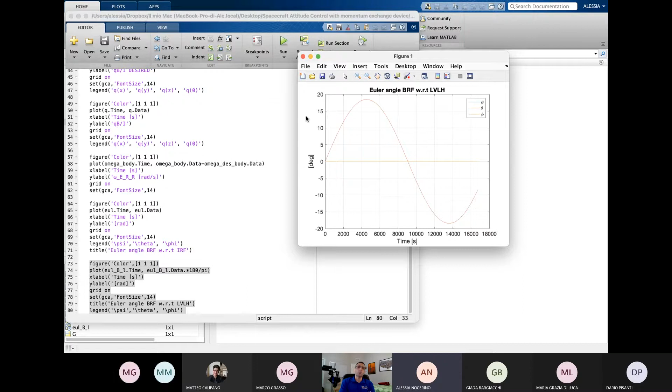It's one orbit? No, these are 3 orbits. 3 orbits. And of course, these are degrees and not radians. I hope so. Okay. So maybe you guys can compare codes and see where the mismatch is. I'm sure it's something minimal, even though

Dario's quaternion error doesn't look like something that should be unstable. It's a constant quaternion, it's constant one almost, and then there's one component that oscillates, but I don't know why it's coming out that way. But yeah, you're getting there. So it's definitely a matter of initial conditions. You don't want to be too far away from it.

The one thing that you can play with, for example, now that you have it working, is keep reducing that 0.9 coefficient on the initial motion until it breaks. It's basically seeing when things are not linearizable anymore. And mostly what's happening is that the LVLH, I guess, is fast enough for your angles to grow outside of a linearization interval, and so the analysis doesn't apply anymore. Make sense?

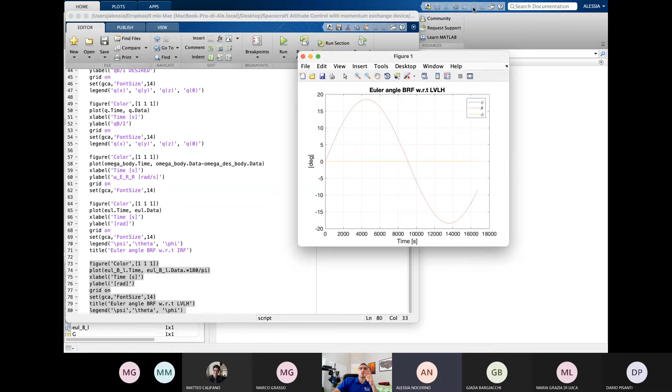Yes. Okay. So sorry, Professor. So yeah, the initial condition should be not perfectly, I mean, the angular velocity should be not perfectly the one of the LVLH. So I think what she has is the 0.9 is 90% the one of LVLH, but that 0.9, as you may recall, was applied before you converted into inertial. Yeah. Indeed, I did the same, but the point was that if I put exactly one, at least for me I have a stable behavior. I don't know, let's try it.

So if you put one, it's stable. For me, it's not stable. It was not stable. Oh, but that's not. Yeah, I thought we had run that case. It's the case when it was perfectly aligned, actually. No, so yes, sorry, I made a mistake. If it is 0, it was not stable, because we now agree that the initial condition should be the one aligned with the. Yeah, that's what we're doing right now.

You start aligned, but you're a little bit slower than LVLH, and that's one way. You can also start with the same angular velocity of LVLH and a little misaligned. Maybe you can play with different initial conditions. The goal is seeing the oscillation, and in order for you to see the oscillation, you need to have a non-zero relative motion with respect to LVLH. So you cannot be perfectly aligned and also moving the same exact way. You're not exciting the pendulum behavior, in other words.

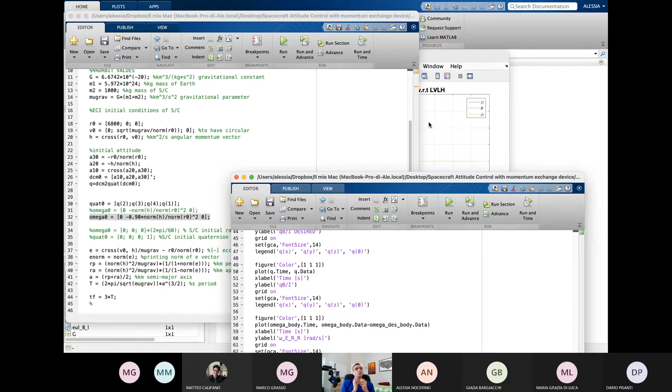But if you excite the pendulum behavior, you need to do it carefully so that it remains small enough that you don't go outside of the region of being able to say that it's stable, right? Perfect. Okay. Nice. And I cannot quantify that. I honestly do not have. I think it depends on many different things, but I would say a few degrees, no more.

And probably if you put 0, 0, 0 for your initial angular velocity, the LVLH angular velocity, even though small, after a few minutes has moved your relative Euler angles to an interval which is big enough to throw away all the linear analysis. Yeah. Okay. So I think you're doing just fine. It's just tweaking things here and there.

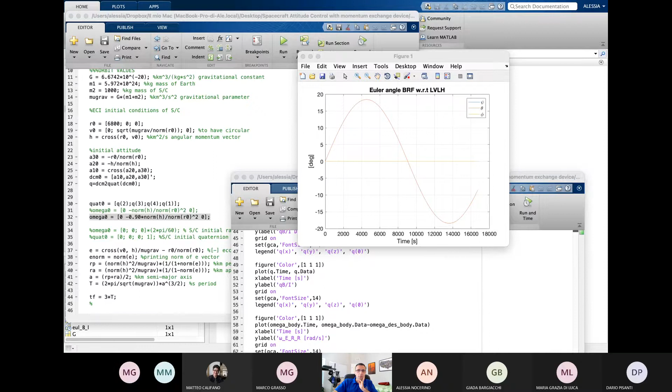I want to just very quickly go over this last material that I put for today without really digging into the details, okay? I also want to upload some code in there, now that I'm thinking about it. Well, first of all, let me share my screen. So, okay, not this one. Just 1 second. So the slides that Camilo presented are in the same folder. And this is the material that I had for today. And as I said, I will just go quickly.

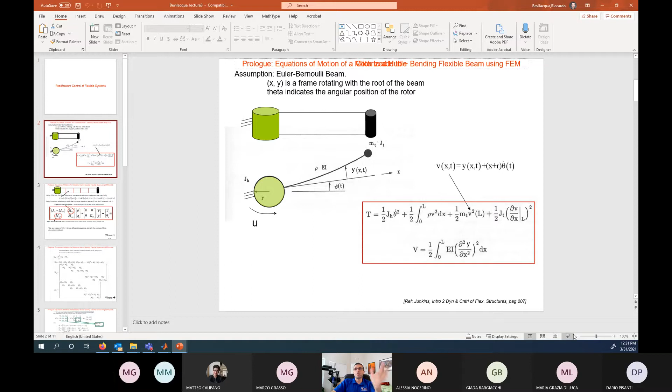But basically, the idea is, okay, let's simplify things, because in general, you will have to do a Nastran model of your spacecraft to compute the modes and the frequencies. You really don't want to do it by hand, except for very special and simplified cases.

And so this represents pretty much what I showed you in the video: a motorized hub, basically a spacecraft, if you like, which is the green one, that can only rotate about its symmetry axis, the axis of the cylinder, and the torque is U, its radius is R, JH is its moment of inertia about that axis, and then you have a flexible arm that has a tip mass with moment of inertia JT, T standing for tip.

You can write the kinetic energy of the entire system, rotational plus translational plus the one that has to do with the continuum, which is the integral that you see from 0 to L for the linear velocity. Rho is the density of the beam, and then this is the term that has to do with rotation, which changes according to where you are along the beam.

And then this is the potential energy that only has to do with, of course, the flexible part, which is the beam itself. And so if you basically follow what we saw yesterday, using the finite element approach to the Euler-Bernoulli beam, you have your shape functions L1 through 4, and you can eventually write your discretized model for the system, where the mass matrix has off-diagonal components that represent the rigid elastic coupling terms.

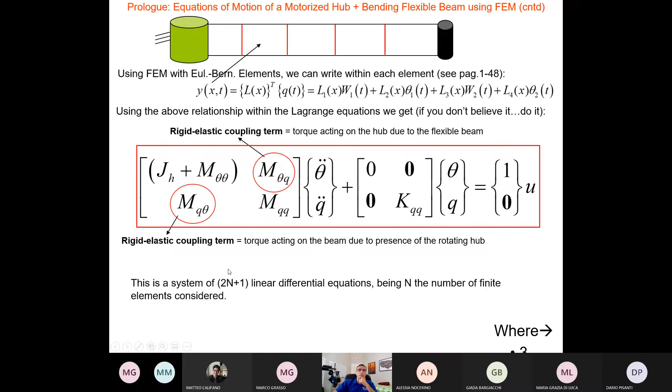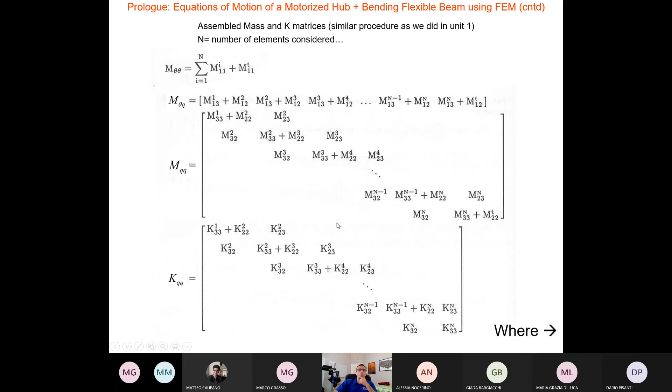Basically, the torque acts on the beam due to the rotating hub, and vice versa. The beam itself flexing will act with a torque on the hub, because it's flexible. And so these are the expressions that you get. In particular, the matrices are given in these forms, and going manually through the same processes that we've seen yesterday, you can show that these are the individual elements that go into those matrices. It's not a crazy exercise, but it's definitely tedious. And in general, as I said, it will be done for you by some software.

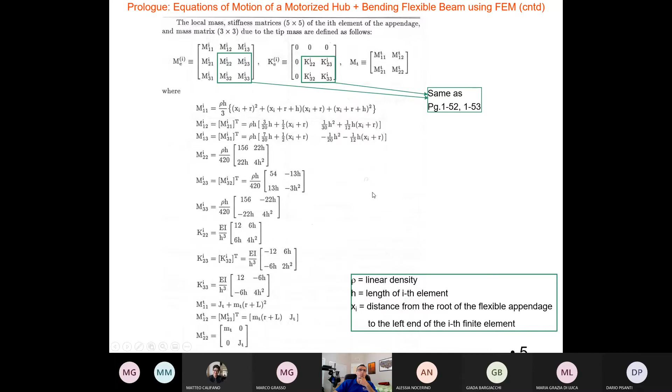So again, these are the equations of motion. You use the modal analysis that we have seen to diagonalize the matrices, basically. And so in the new state, you can find a matrix that has on the diagonal the natural frequencies of the system. And also, if you want to add some damping, you're more than welcome to do that, but that's something that we have to make up or measure through experiments. This type of representation can be put in the linear state space form, like a linear time invariant system.

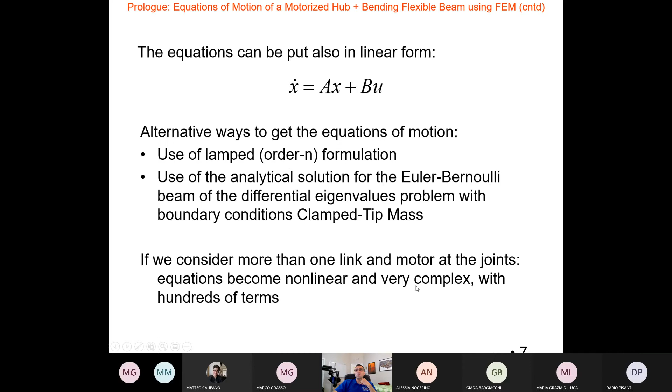And so, bottom line is that if we consider one motor, one link, the goal would be to control now the orientation of the hub, but at the same time, what the tip mass is doing. If I go back to the example itself, you can interpret this as a spacecraft that is trying to reorient an end effector. Maybe there is something here that needs to grab another spacecraft. And so your goal is reorienting yourself, but also, since you can only act on the hub, what do I do to manipulate the position of the tip mass in an intelligent way?

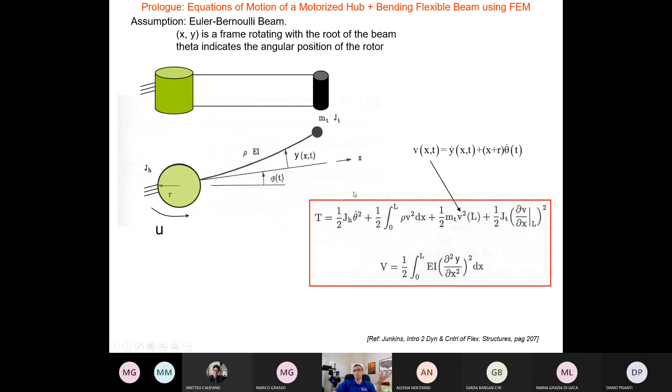And maybe the intelligent way is just that you want to reduce any residual vibration after the reorientation, as we've seen in the videos, and that's a good enough goal. But you have to do it with just one control variable, which is the torque on your hub. And so for feed forward, we're not really doing any feedback control, but basically what you're going to do is this. You have a reference motion for the hub. So you want that to be reoriented, I don't know, 45 degrees, and you would like to do it maybe time optimally. So if everything was rigid, you would do it in a bang bang, but you can't.

And so you filter that through some feed forward controller, in fact we're calling them filters, something that modifies the reference, the desired ideal rigid signal, to make it aware of the fact that things are actually not rigid, and I have a model to represent the flexibility. And then if you want, you could have a feedback controller that would make things a little more elaborate, but we're only going to see feed forward, so this would not be there, not even the feedback here.

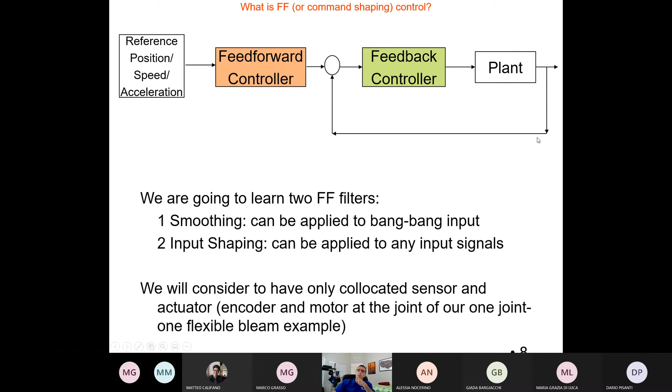So, no details about this, but two different types of approaches. One is smoothing the signal. In other words, say that my reference is a bang bang, as I just said. I want to reorient my hub, and I want to do it as fast as possible, so I do maximum torque in one direction and then maximum torque in the other direction to slow down and stop. You can smooth that bang bang and make it look like you see in this graph by adding some rise time where you would actually see the step functions, okay?

And so this is a mathematical form to do that, where you decide, okay, I want to go from 0 to the maximum torque in a certain interval of time, delta t, and then go down in 2 delta t to the minimum torque, and then go up to 0 again in the same amount of time. And so these are the equations that give you how you would reshape the bang bang and the new calculation of the final time, which is, of course, longer. If you were doing a maneuver that is exactly bang bang, it would take less to reorient everything, but in this case, you cannot.

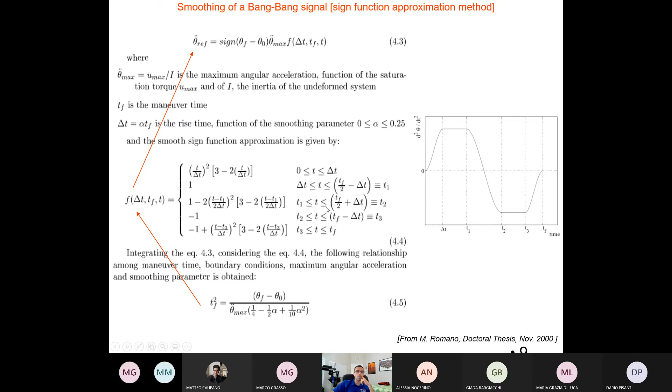And this is actually in a thesis from my former postdoc advisor, Professor Romano, who's at the Naval Postgraduate School. He used this technique for some experiments. The other one that I showed you in the videos, and I have a Simulink file that runs this, is input shaping. Instead of taking the bang bang and smoothing it like you've seen before, you perform a convolution of the original signal, the bang bang, so basically maximum torque, then minimum torque, nothing in between.

Instead, you do a convolution with two or more impulses. You can have more than one. The original one, again, no demonstration here, that you see in literature is with 2. Then there is a more robust version that has been proposed that has 3 impulses.

And these k that you see in the amplitude of these impulses are given by the exponential of minus zeta pi over the square root of 1 minus zeta squared. That's the damping of your system, and then where they are in space is basically given by this other quantity, which is delta t, and the omega 0 is the frequency that we want to kill, that you want to eliminate.

And so if I am focusing on the first mode of vibration of the flexible link, the first omega, which is usually the most important because it corresponds to the highest deformation, then I design the input shaper to do this. And we'll see in terms of the signal what it actually means. It means this. You have a reference acceleration. Again, this would be your bang signal, for example, and you convolute it with the input shaper.

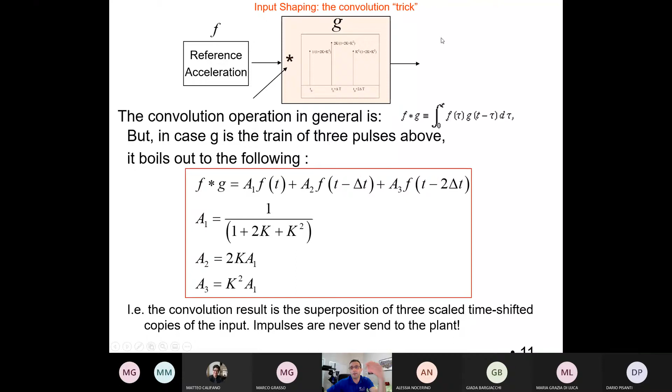The impulses are never sent to the plant. This is basically a filter. This is taking the reference bang and it's spitting out something different. So since I said I would go high level, I'm just going to show you a model that does exactly that. And I'm going to upload all this into the same folder, if I ever get to move this to the right window.

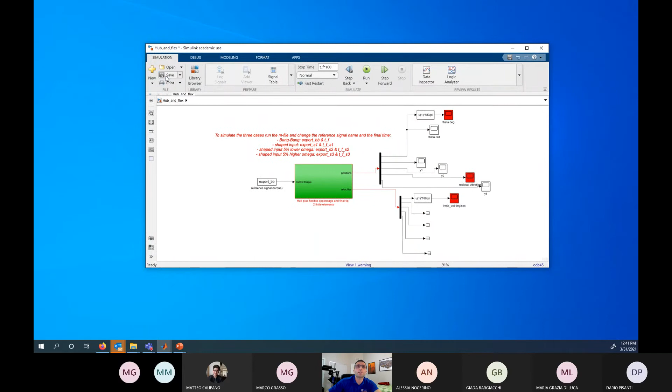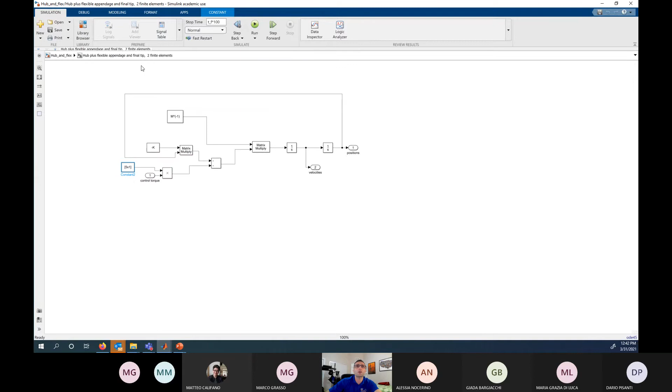Okay. So this is a very simple model that simulates here the hub plus the flexible appendage and final tip with two finite elements. So it's very simple inside. It's a matrix multiply and a K matrix that comes from an initialization file that I have to run, and a mass matrix that has to be initialized. I don't know what this is. This is just a vector of 5 components. Anyways, we don't really care. You can spend more time on looking at the details.

But basically, I have an initialization file, or main file, that you have to run first. Okay? It's a pretty long one. You have the mass of the tip, J of the tip, etc., all the variables, the maximum torque. And then you start putting together the components of the mass and stiffness matrices. You find the frequencies. And let's see, what do we have here?

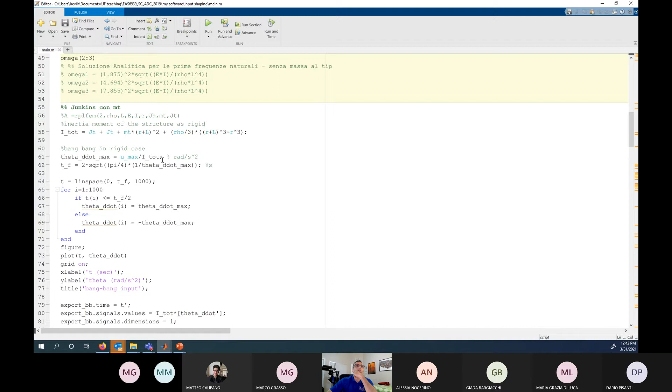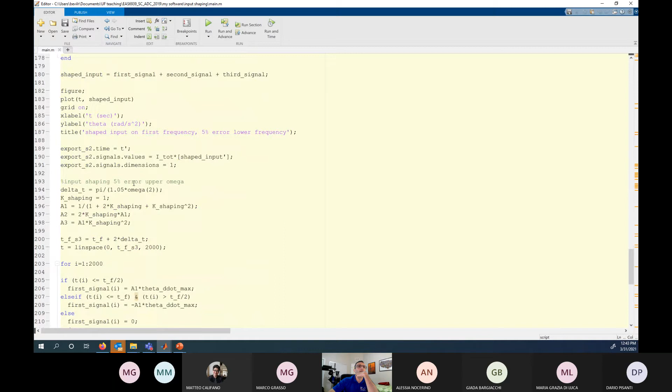Okay, so now we start shaping the signal. So you see, this is actually the bang, and we plot it, and then we start playing with the different input shapers. This is the first version, and I believe I have a second version with a 5% error in the omega, and a 5% error in the other direction for the omega. So if I run this, it's going to show you,

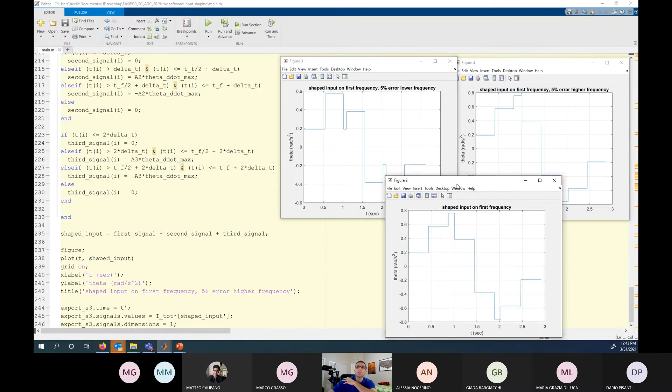okay, the different acceleration profiles, or torque profiles, rather, that I'm going to give. Well, it's actually in terms of angular accelerations. So you start from this. This was my initial signal. This is what I wanted. I wanted in about 2 seconds to reorient my hub, ignoring the fact that there is something flexible attached to it. And then you realize, well, I can't do that because it's going to result in one of those videos that we saw yesterday where things are going crazy and oscillating.

And so, okay, this is the input shaped bang when you use just one frequency, the first frequency, the first mode. So this is really what the impulses are going to do. They're gonna, as you can see, rescale the bang values. In fact, you get to that almost 0.8 only for a short amount of time, and same down here, and they're shifted in time.

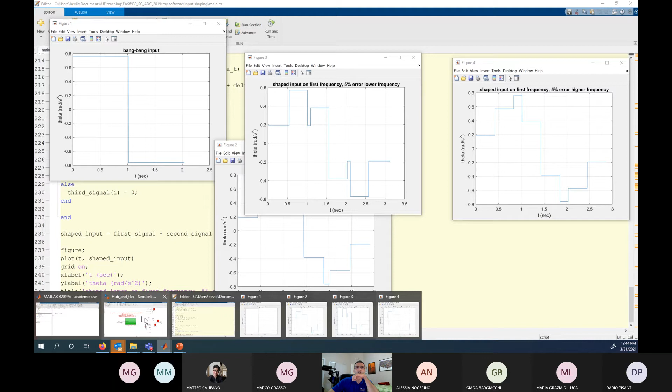And this would be an input shaper when you assume that you have knowledge of a frequency which is a little bit inaccurate, 5% less, and this is 5% more. And so I want to see the effect of these different shapers. So I take this model and I run it. So this is the reference signal. This is what I get when I have bang for that type of flexible system. I run it and I look at the theta, and the theta is going crazy. As you can see, it's not really looking like it's been reoriented to any value, it just keeps going.

And that's because there is a residual vibration that I haven't even considered. And as I said, in the equations of motion, you have those terms in the mass matrix, m theta q or m q theta, that are basically telling you, okay, I apply a torque to the hub that is going to excite my flexible link and apply a torque to it, but vice versa, the flexible link is moving back and forth, that is going to apply a torque on the hub, and that's why things are not going anywhere.

So this is the bang. Then for the first input shaper, where I have perfect knowledge of the frequency, I have to change this and call it export S1. That's the vector that comes in. And I also have to, these are the instructions, TFS1. It's a little bit longer, right? It's a longer maneuver. I'm running it for 100 times that, because these are very short maneuvers and I want to see the long-term effect, of course.

But just sorry, Professor, yeah. Before running, I think I cannot see the scopes. The one that you have, yes, this one. Oh my goodness! I'm sorry. Okay, now yes. Yeah. So this again. Thank you. Good thing that, yeah, thank you. Good thing I didn't run it.

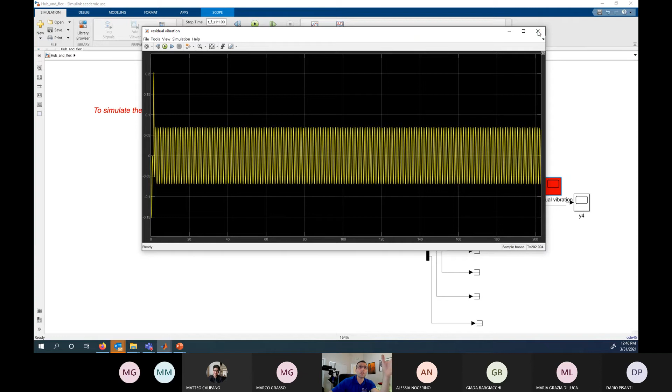So of course, this is a terrible way to show plots. I hate scopes because they come with no units and no names on the axis. But anyways, this is a residual vibration with bang. It's just there and it's pretty important. And this is the theta behavior, the angle of the hub that I wanted to reorient, and of course it's not really stopping. It's not starting from 0 and going to 45 degrees. It just keeps going because I ignored the frequency, the first frequency.

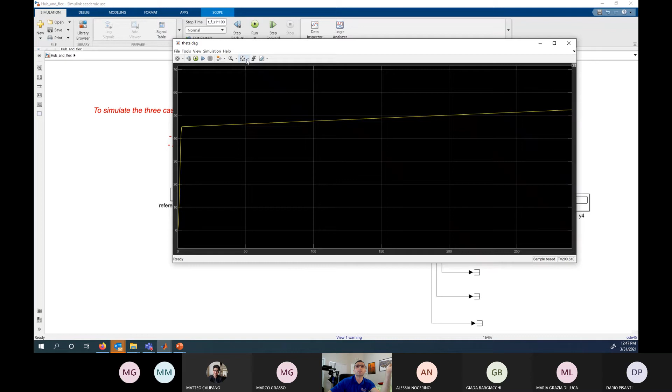Now instead I have a bang, an input shaped signal. I'm running it for 100 times the actual end of the maneuver just to see how things look, and it's done. And my angle, well, still growing, but it's getting there. It's definitely less oscillations, but there is a residual drift, unfortunately. And then the residual vibration is definitely less. And again, this is feed forward, and I'm using the first frequency only. So I'm targeting that one. But definitely there is less residual vibration.

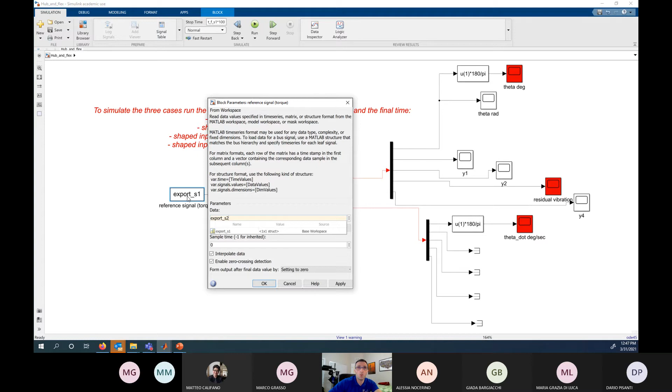Then let's see. The second one is with the lower error for frequency, S2, and I have to change the time to be S2. And I run it. And let's see what this looks like. Yeah, expect it to be worse because now I'm still trying to take into account the frequency, but I know it with less accuracy, and it's getting a little uglier again, but better than just the blind bang.

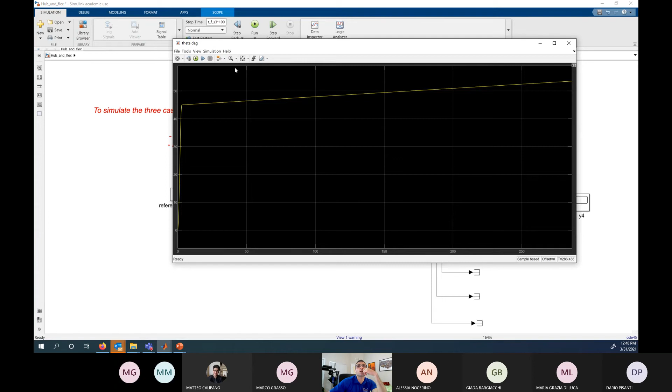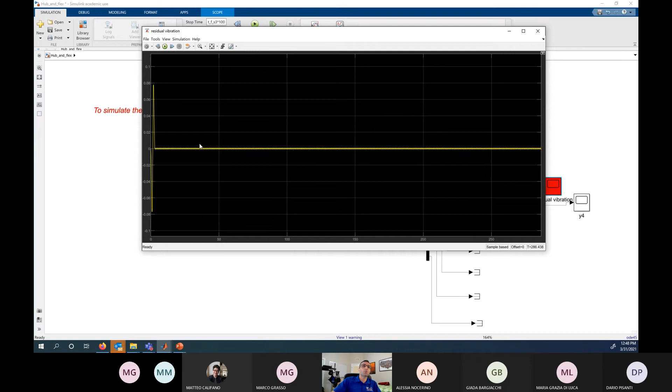And lastly is the one that has an estimate that is a little too high for the frequency. And it goes back to killing the frequency. I mean, you're being conservative. You think that there is more flexibility, and so you're definitely doing a better job on the oscillation, but you're only focusing on the first one. So you could shape your bang taking into account more frequencies and basically try to avoid this initial behavior, because this is really what's causing your misalignment and drift at the end.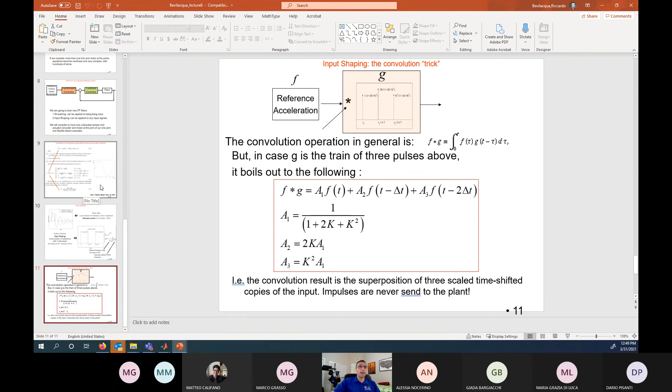So this is, in a very short amount of time and in a very simplified model, the effect of flexibility on a system that has to change attitude, that has to change orientation. And this is one potential way to attack it: being aware of the modes of vibration and trying to reduce the excitation of them in the design of reference signals. And this is open loop, it wasn't even feedback.

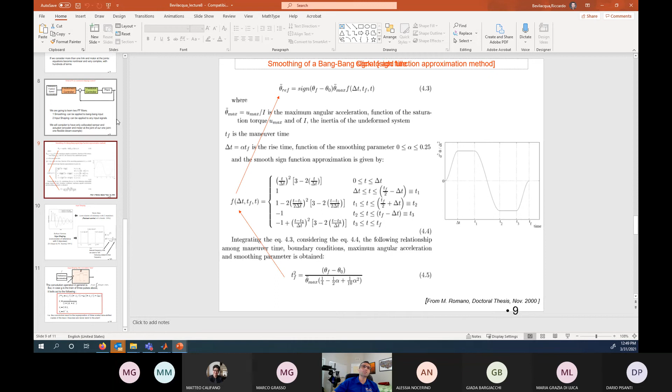And I think I've given you enough for a much longer class. Do you have any questions on these? I'm gonna share this software in the same folder in case you're interested. No questions?

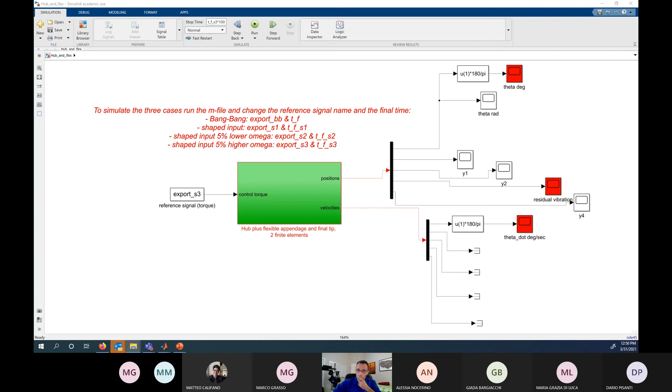Okay. Where is Teams? I can find Teams. Okay. It looks like we're almost done. I'm going to stop here.